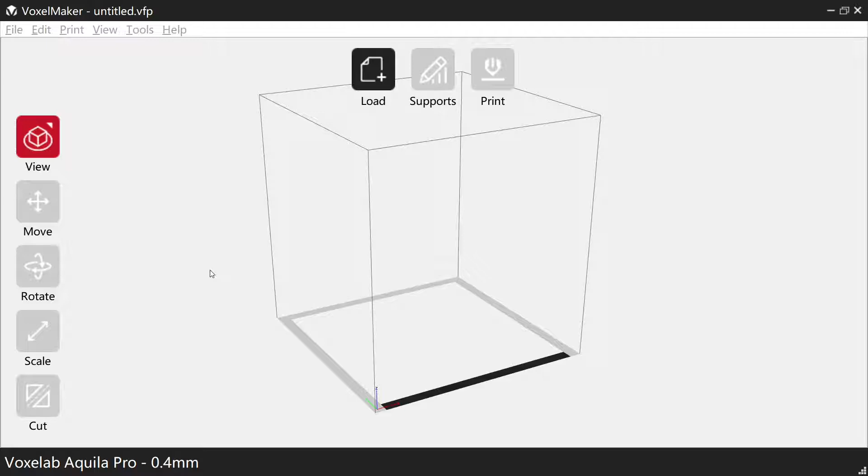In this video, I'm going to go over the VoxelMaker slicer that you get with your Voxelab printers. In my opinion, it's better to use with these printers than Cura. Personally, I have not gotten as good of prints from Cura as I've gotten from VoxelMaker. It's simple and easy to use, and there's no confusion about it.

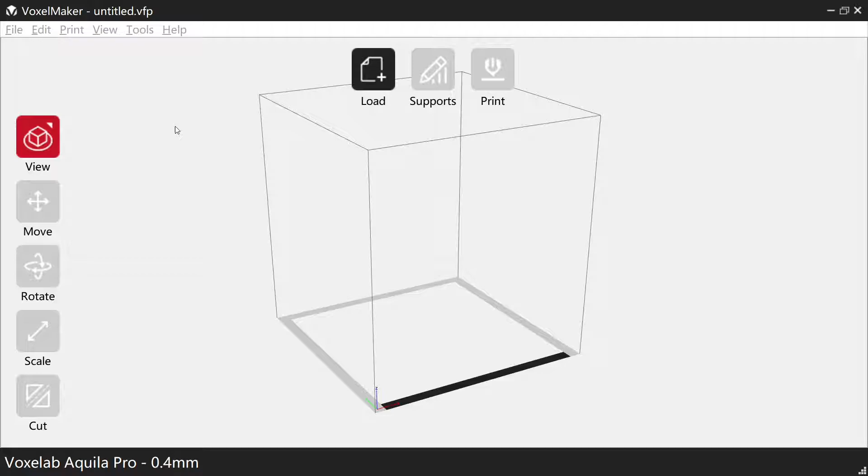So I'm just going to go over the slicer and show you how to use it. First thing we'll do is go over to the top. This is your menu system. You have File, Edit, Print, View, Tools, and Help.

To delete a model off your bed, you need to come up here or just press the delete button.

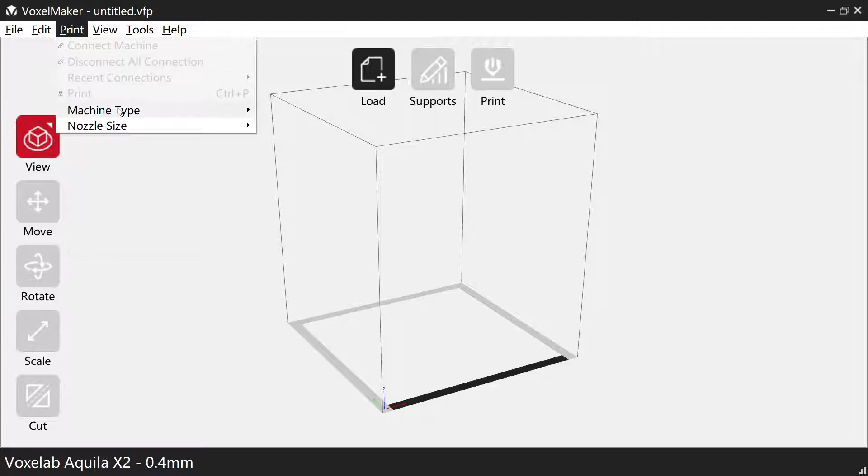First thing we're going to do is make sure we have the correct machine type selected. You can come in here and change it to whatever machine, Aquila X2, or in my case, the Aquila Pro. Once you have chosen Aquila Pro, it can connect to your network wirelessly, and you can print wirelessly.

You can either connect it right now or later on when you go to slice, so I'll just connect it now. It comes up with this option to connect machine. Your two options are automatic and Wi-Fi Ethernet. If you don't see your printer here, rescan, or you might need to restart your printer and restart your VoxelMaker.

As you can see, I'm connected and the printer's ready to go. It actually just finished up a print, so it's in the process of cooling off.

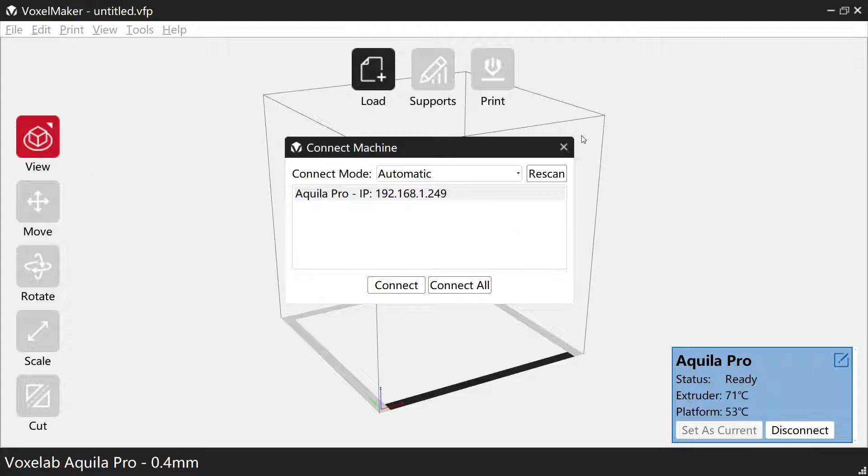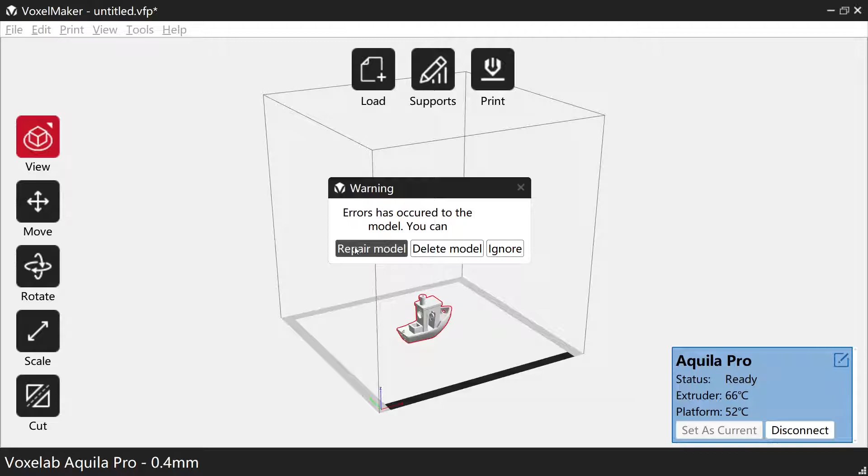Alright, now before we can do anything, we need to load an object. So let's go get a Benchy, and it'll open it up. It comes up with this error that it has some errors, so you just repair it and it'll be fine.

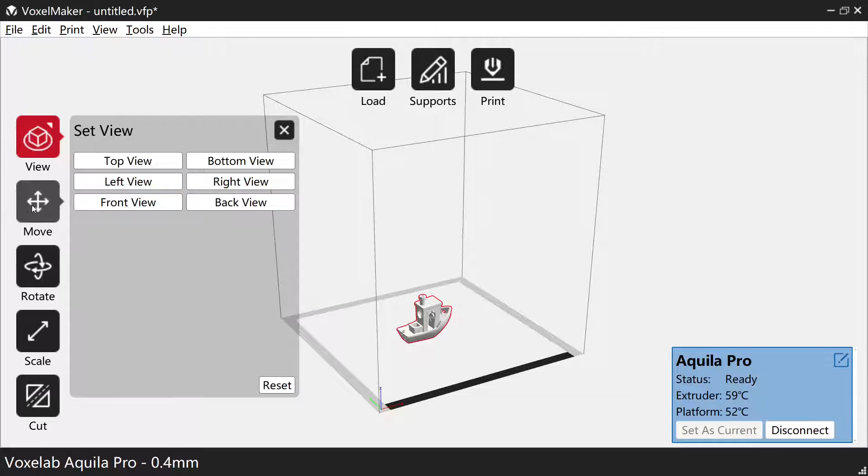Starting on the left side, we have View. To click on any one of these, if this window isn't open, you click on it once and it turns red. Click on it again, it opens it up. Once this is open, you can just click on any one of these and the windows will open. So we'll start with View.

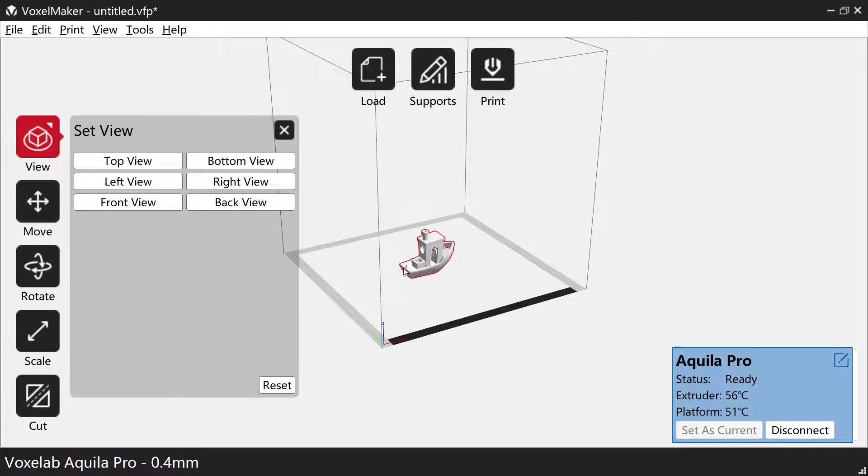You just have several different views here of how you want to look at your model. You can also just reset it to the standard view, which I just do. You can also move the model around with your left mouse button, move it more towards the center of the screen. Your right mouse button you can rotate, and your mouse wheel you can move in and out. So I'll just hit reset and it resets the view to the stock view.

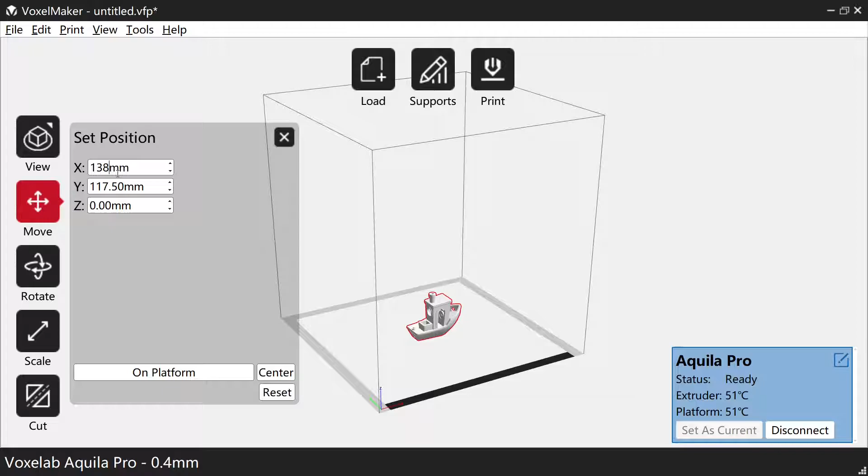Okay, moving the model is fairly easy. You can just grab it and move it to wherever you want. You can see up here that the coordinates changed as you were moving your model around. So one option is you can just change the number in here. You can scroll up, down, whatever you want, or you can just type in a new number and hit tab and it'll move it over to that location.

Also on here, let's say you have a model that for some reason is up in the air and is not on the platform. You can see it's not on the platform. Just press this button, on platform, and it'll put it back down, and then hit the center button and it'll put it back in the center if it wasn't already.

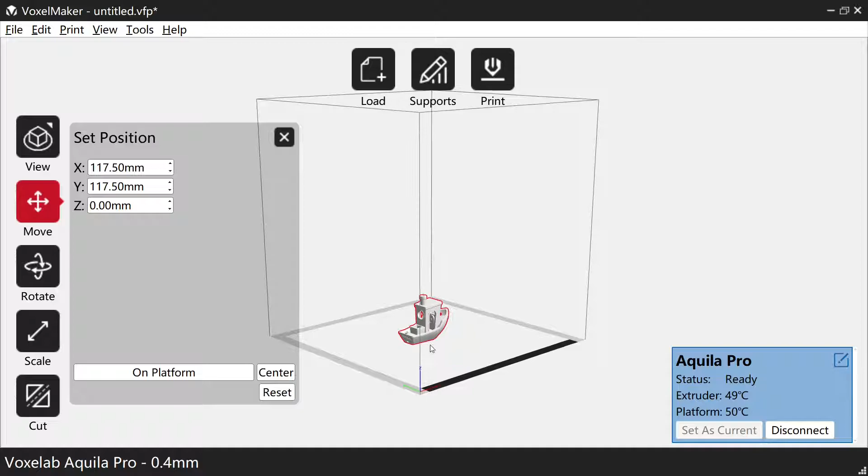Okay, the rotate button, you can rotate using the three different color wheels, blue, green, and red. Right up here in the corner, this is your origin, and it also shows you the axis direction, and this is important for rotation because the rotation rotates the model through the axis. So if you want to rotate it, let's say you want the bow to face towards the front of the printer, then we want to rotate it on the Z axis because it's going to rotate it around this way and it goes right through the Z axis.

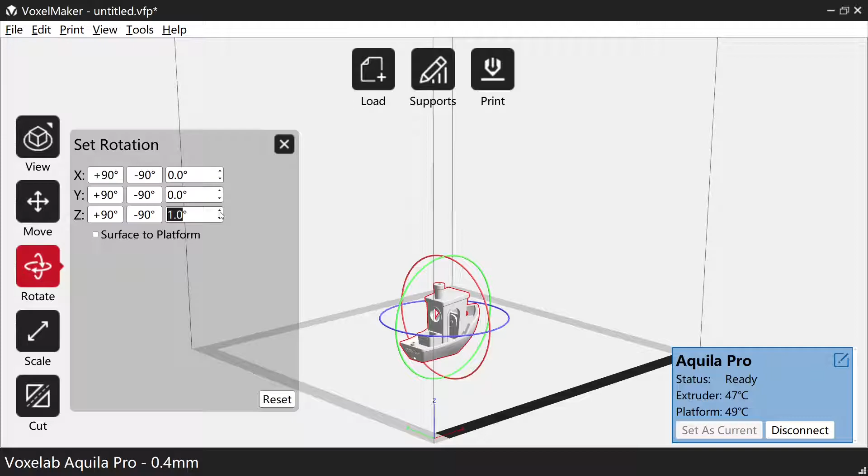So we'll just hit -90 and it rotates it. Now I don't know why -90 is that way when I would think going clockwise would be the correct way to go, but you can also just rotate it using this box and using the arrows, or you can just type a number into it, -25, hit enter, and it rotates it.

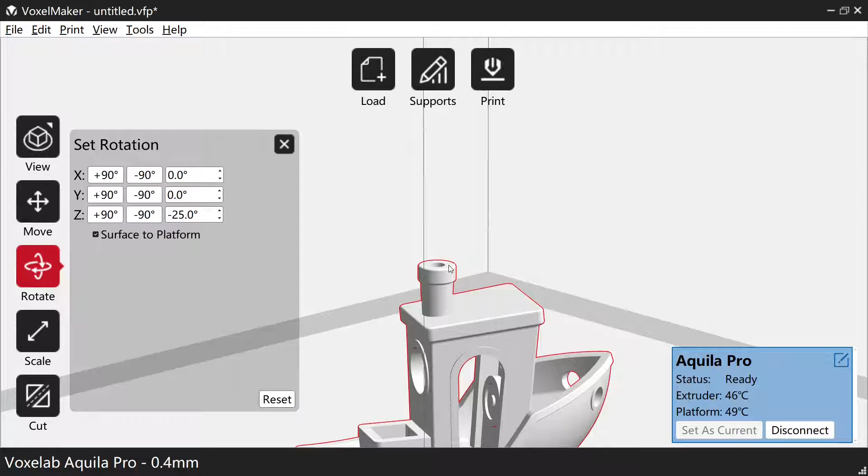Okay, the surface to platform option, if you want a specific edge on the bottom on the build plate, then you just double click that edge. So I've double clicked the top of the stack and it's now put the stack on the bed. We're going to leave the print like this, so when we get into supports, we'll need this.

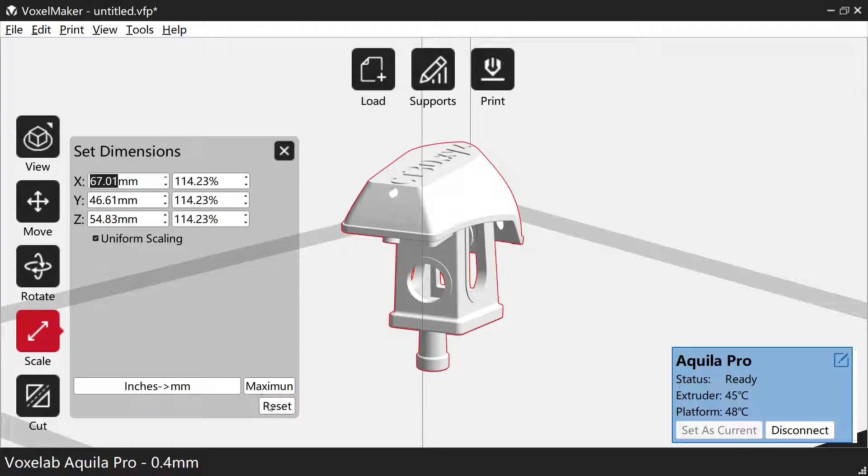So scaling is the next option. Like everything else, all the other slicers, you can scale uniformly, which means if you change one setting, you change them all. You can also reset it and also make it the maximum size it'll go.

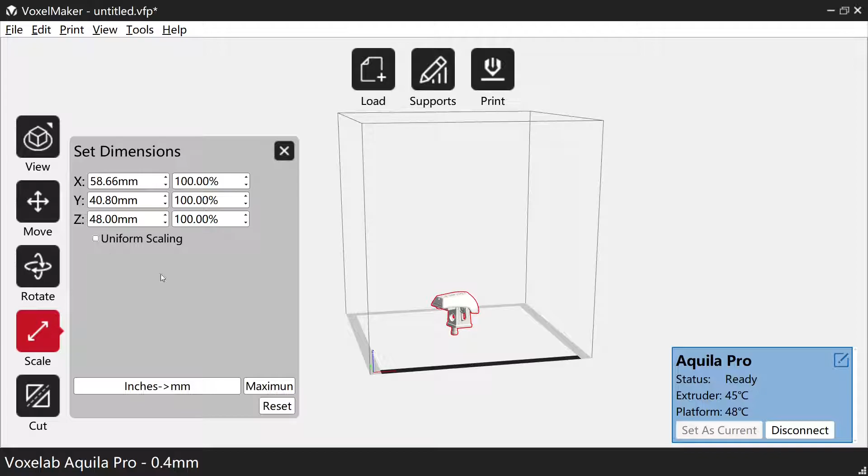You can reset it, and you can type in numbers. If you uncheck uniform scaling, you can scale just one axis however you want. Okay, so let's reset it.

Okay, the cut option. Now the cut option works in conjunction with your view, so there's several ways to cut the model. You can either draw a line with a mouse, which is just like that, or you can cut through a plane.

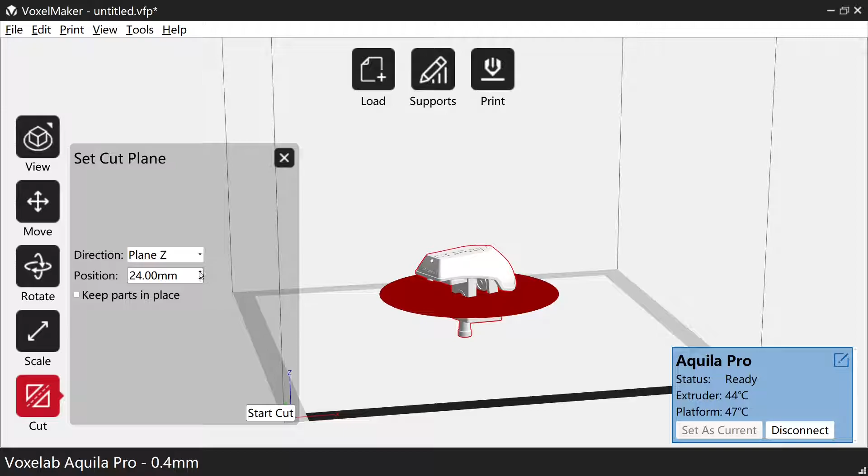Then once you have the plane, you can change the position of the cut. Now if you hit start cut, it's going to cut and it'll separate the two pieces. Okay, let me undo that.

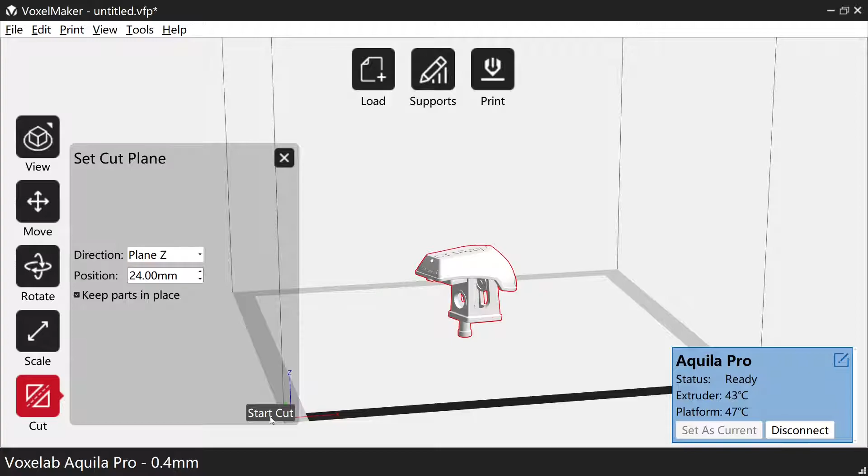Control Z, select the model again. If you keep the parts in place and then cut, it'll keep the parts in place, but you'll have two separate parts. So let's undo that, we need one part.

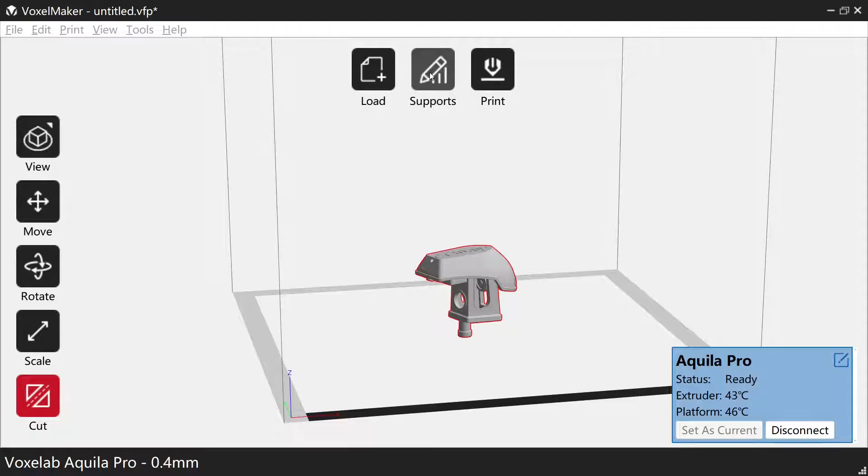Alright, now we're going to go through the support options. So I'll click on supports, and first thing you want to do is go to support options and choose which kind of supports you want. Do you want linear or tree-like? You choose what the threshold is, the size. They each have different settings, so you can change those settings however you want.

Touching build plate only, or if you want supports on the model as well. So right now let's leave it on touching build plate only, or touch platform only, and we'll do some linear supports. I'll hit OK.

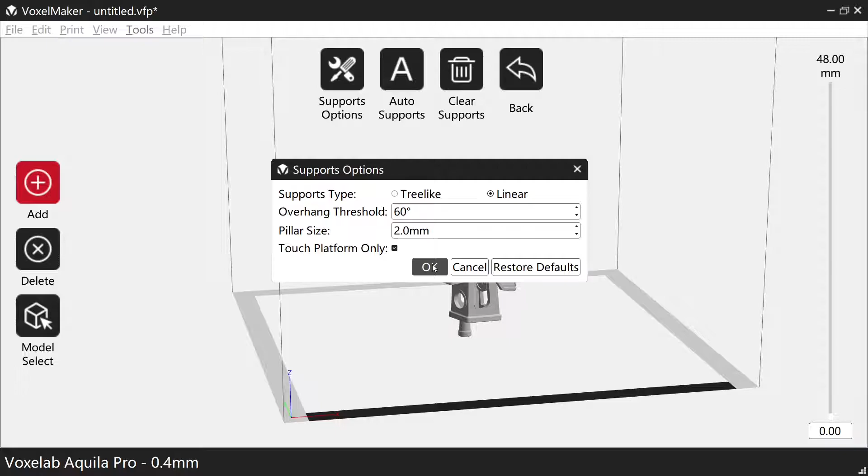And then you got to go to auto supports. Okay, so it's generated supports. You can see all the supports it's generated. You can see a ton of supports under there, right?

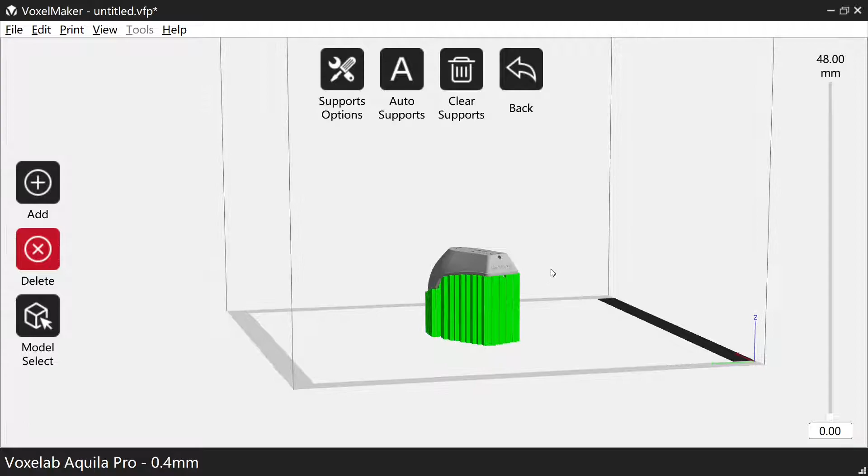Okay, over here on the left side you have add and delete. So you can delete some supports. If you only want to support the outside, you just start clicking on these to get rid of them. It'll take forever. You just delete them as fast as you can, or just clear supports, it'll get rid of them all.

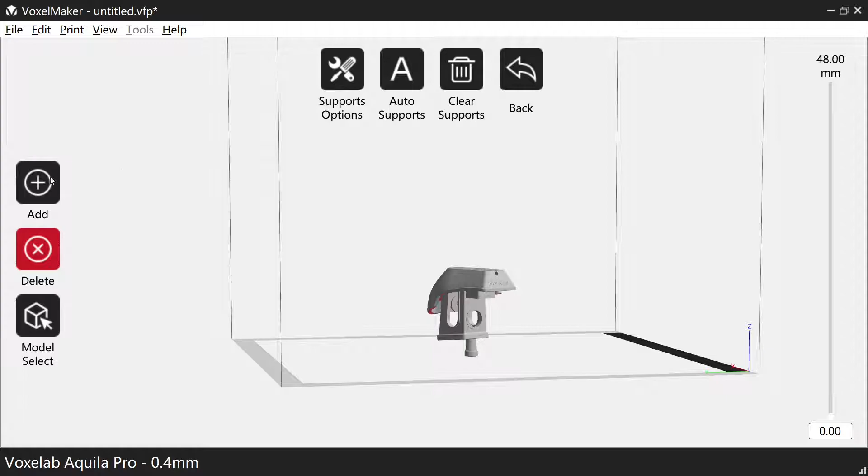Okay, now to add supports when you're in linear, it's easy. Once you get over here to the model, the support automatically shows up, and you just move your mouse around to wherever you want your support, and then just click one time. It puts a support, and then another support becomes available. So you can do some custom supports however you want.

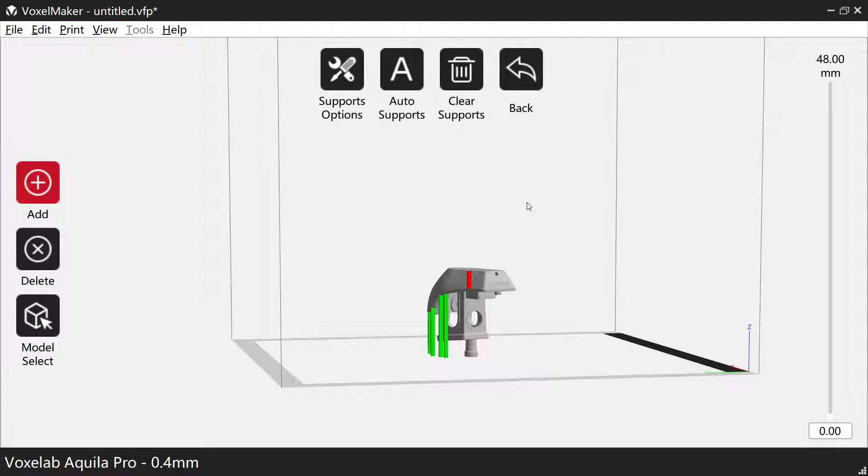Alright, let's go to tree supports. Okay, again, we're touching platform only. Hit OK, and then click auto supports. It'll now generate supports, and this is what it generates. So you can see it did a fairly good job.

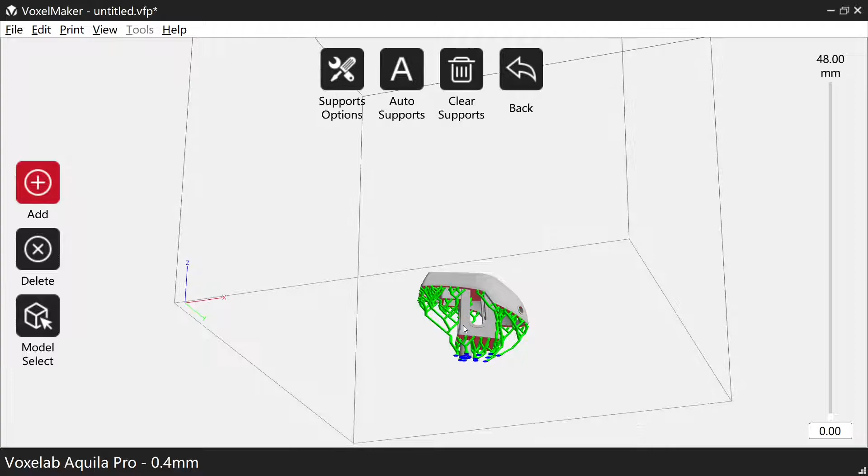The thing about the supports in this software is it's not 100%. It's not going to get everything that requires supports. Like you see how it didn't get up in here.

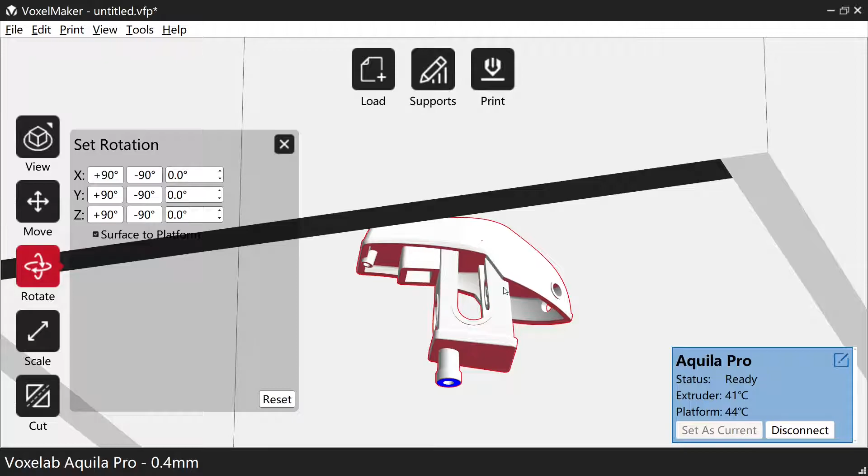Let me show you another way. Let's rotate this back to put it back on this like it should.

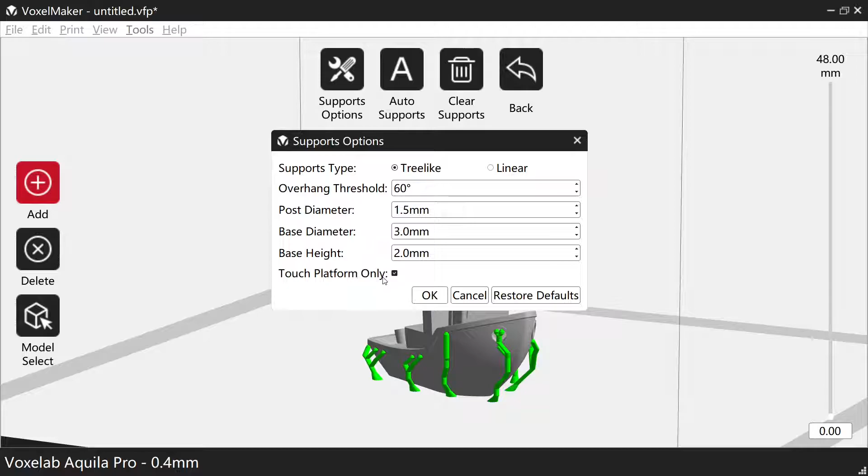Okay, then go back into supports. Let's do auto supports. Okay, so we did build in touch plate only, or build on touch platform only - I keep getting mixed that up. So let's deselect it. Let's stick with tree-like, and then auto supports. It'll delete the old supports and add new supports.

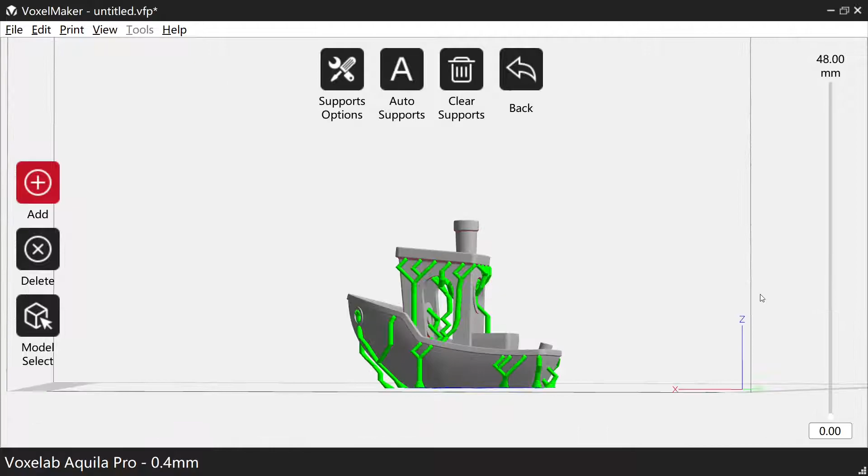Alright, now see, this is what I'm talking about. It put supports on 3 sides of this canopy for the bridge, but it did not put any supports on the front side. I mean, I think the front side, the lip is the same as the other side, so I don't know why it wouldn't do that.

Okay, so we're going to take the opportunity to add some supports here. We'll add in the front. What you do is you want to click on the location where you want the model, click and hold, and the only way it's difficult to get it - see how it's red? You want to do it when it's green and then let go. So you click and hold.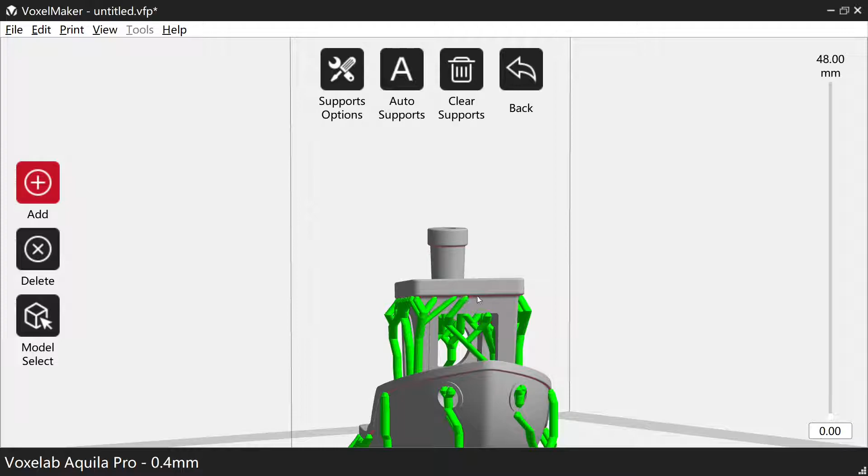Okay, so it can tie into that model, that support right there. So you can add supports wherever you want - well, not wherever you want, because some spots it's not going to let you do it. It's just really finicky and not very intuitive when doing tree supports.

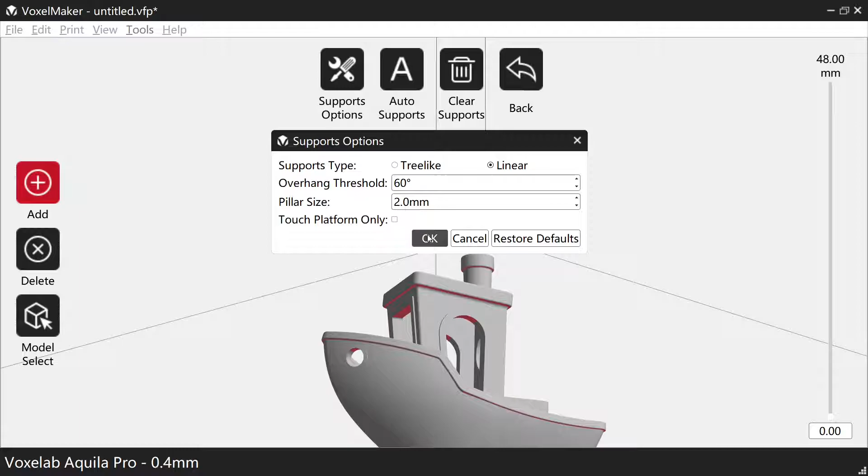Okay, but when we do the linear and we do it everywhere, this is what we get. You can see how it did the linear supports all around the platform and the canopy, the top of the canopy. It's inside the bridge.

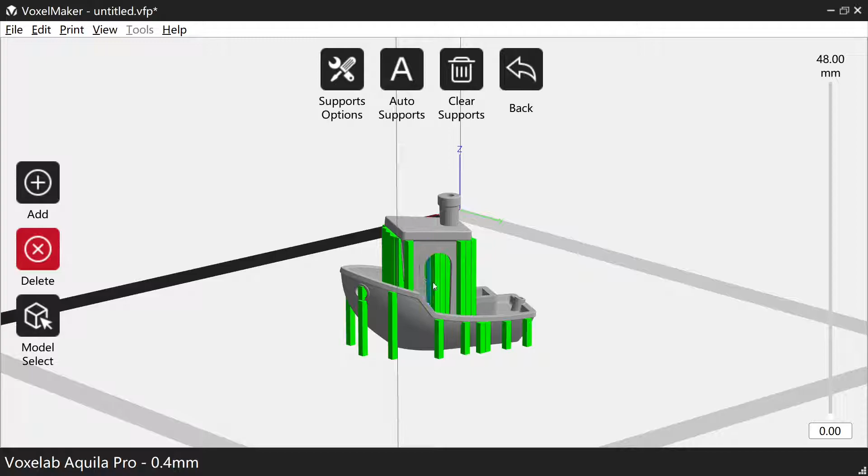Let's delete a couple so you can see inside there. So you can see it's got a bunch in there.

So, but this model is made to not print with support, so we don't need that. But I just wanted to show you the support function and how it works.